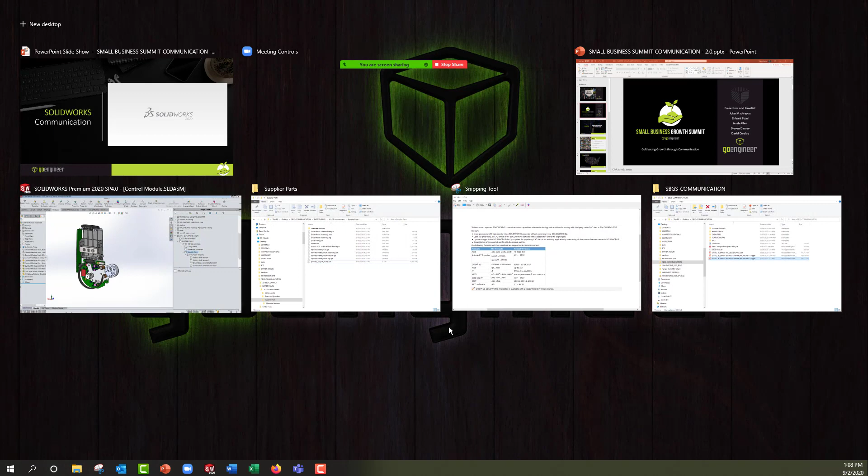I'm going to close this file here for just a second. So I've got a part. And with 3D interconnect, first you want to turn 3D interconnect on. At the top of your screen, click on Settings. And over on the left side, click on Import and make sure that this is enabled. Enable 3D Interconnect and click OK.

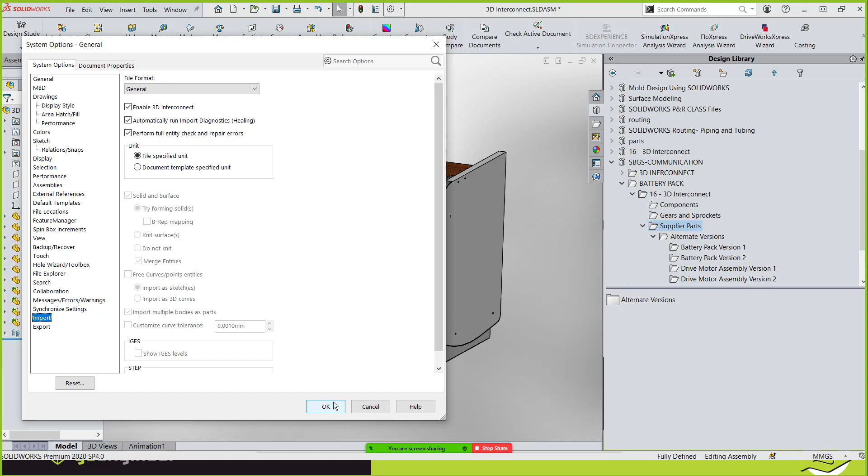And what that's going to allow us to do is to be able to bring in files. So what we want to do is we want to bring in a non-native SolidWorks file. Over here in our feature tree, you can see that some of these look just like SolidWorks parts. And you'll notice that some of these have a green associative arrow to it. That is allowing us to maintain that connectivity between a part that is a non-native SolidWorks part and our file. So let's import this part file.

So I'm going to go to Insert. I'm going to go to Component, Existing Part. I'm going to browse to here. And what we want to do is we want to bring in a non-native file. So over here on the bottom right of your screen, click on All Files. And I'm going to bring in an STP file, a step file. Now I'm just going to load it in.

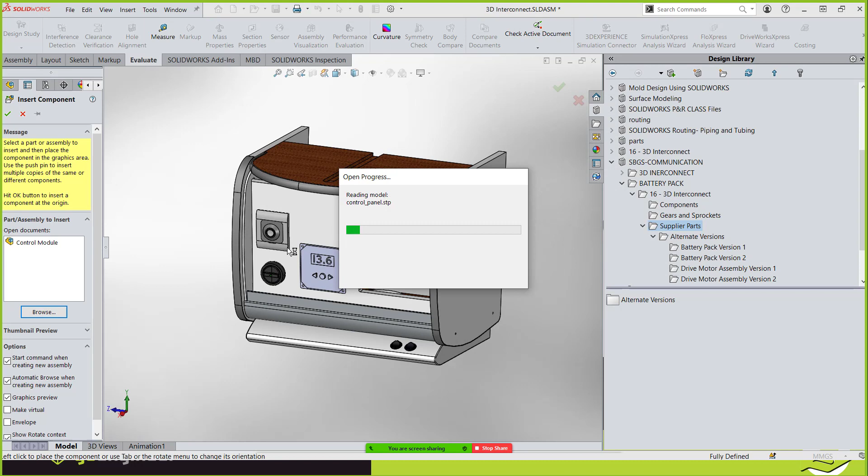And you can see here I brought it in. I dropped it in place. And I can do things with this, especially at the assembly level. So I'm going to pick on this edge, and I want to mate it up properly. So I'm going to right-click now, and I'm going to select Select Loop. And this loop right here, notice how when the arrow's pointing away, it's looking at this face.

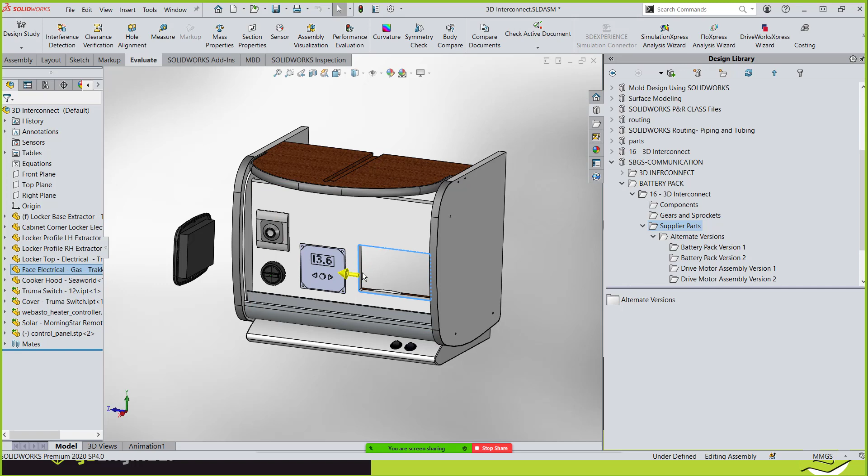But if I click on my arrow, I've now got the front edge of the plate. I'm going to hold down the Shift or the Control key. I'm going to pick on the back of the face. I'm going to mate this guy in place. And over here on the left, I'm not going to use a standard mate. I'm actually going to use an advanced mate, and we're going to use Profile Center.

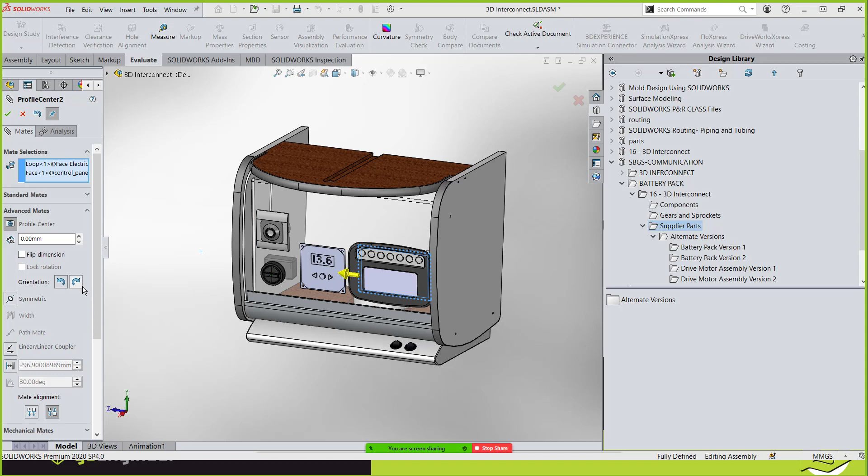And it came in upside down. Well, we're not finished mating this part up. We've got these two little arrows here, clockwise, counterclockwise, so I can just pick. And now I've got my part in my assembly. And my green check, and we're all good. Notice that control panel's added in, and we have our associativity to the original part.

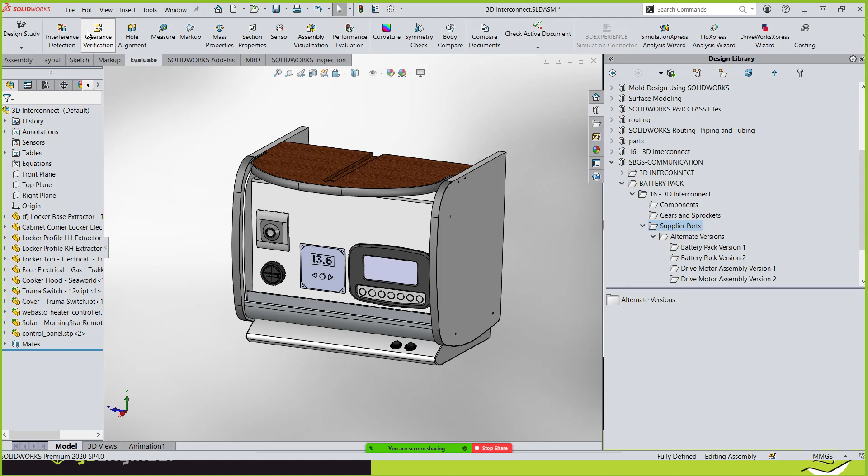If I wanted to check its fit, I could run evaluate, and I could run interference detection on this assembly. I'm going to close this one.

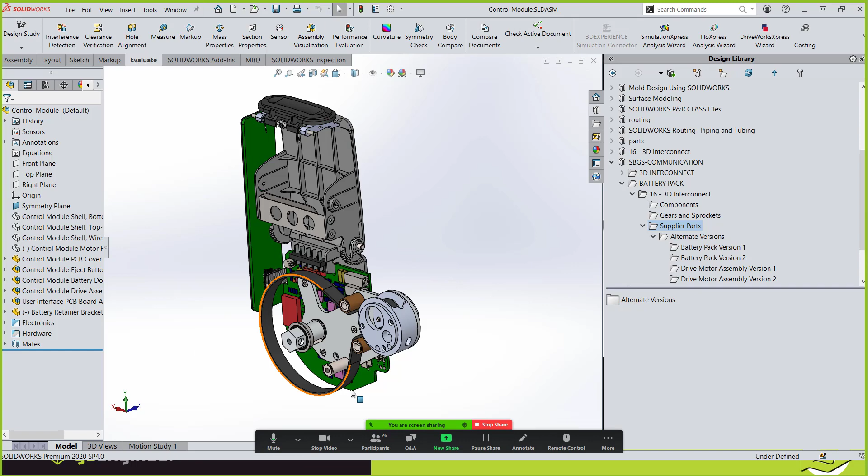Now we've got another assembly. And in this assembly, I want to bring in a PTC file. But first I want to open that part and I want to make some changes to it so that we can mate this part up properly in the assembly. And then what we're going to do is we're going to have some communication back and forth with our vendor. And then they're going to tell us, hey, we need to make some changes. We'll communicate those changes and then we'll reinsert this part back into our assembly.

So to do that, I'm going to go over here to, I'm going to open up some parts. 3D interconnect.

I'm going to open up this file here. It's a .prt.1. The way PTC works their revisions is the .1 is just telling you the revision. The .2 would be the latest if there was a revision, or a .3 or 4 or 5. So let's double click.

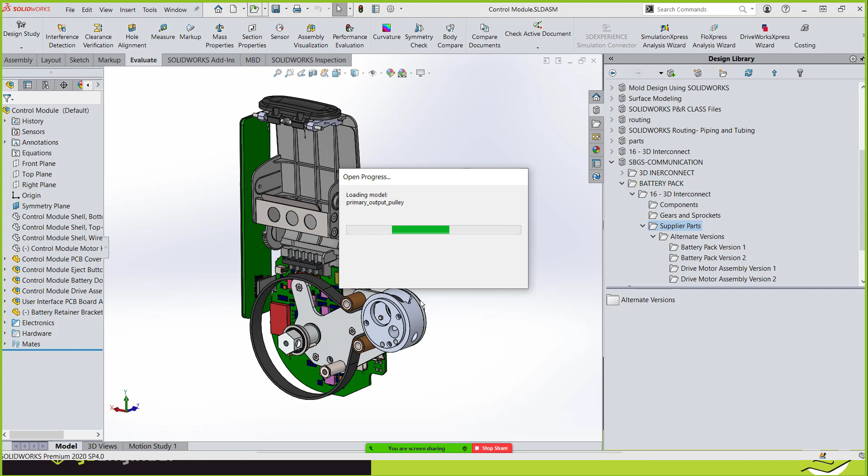And we're going to begin the translation process. So now we have our part in place, and there's our gear. Do we want to run diagnostics? I always hit yes, and it's looking for any faulty faces. We're just going to hit green check OK.

So now what we want to do is add some features to it. We've already added, in advance of this, a keyway and a curved slot to this part. So I'm going to drag my keyway over.

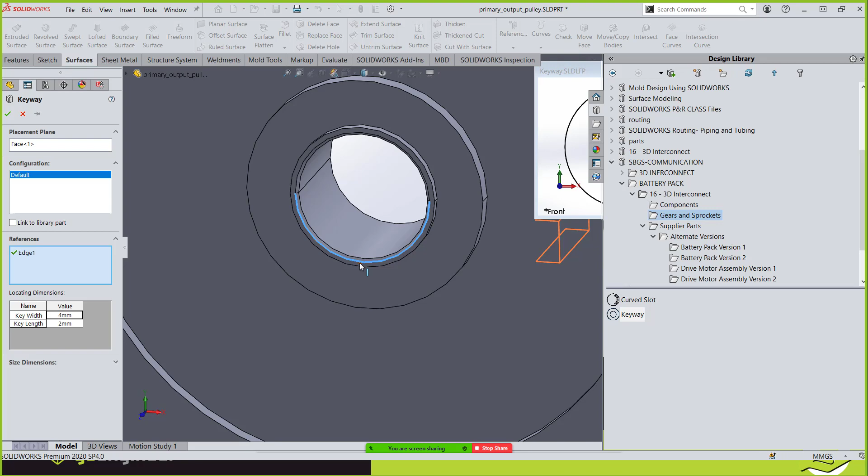I'm going to pick this face here, and over here on the left it's asking me for an edge. I'm going to zoom in and pick this edge. It's going to think for a second, and it's going to put that keyway into our part, the same way we would have done if we had just a native SolidWorks file, right?

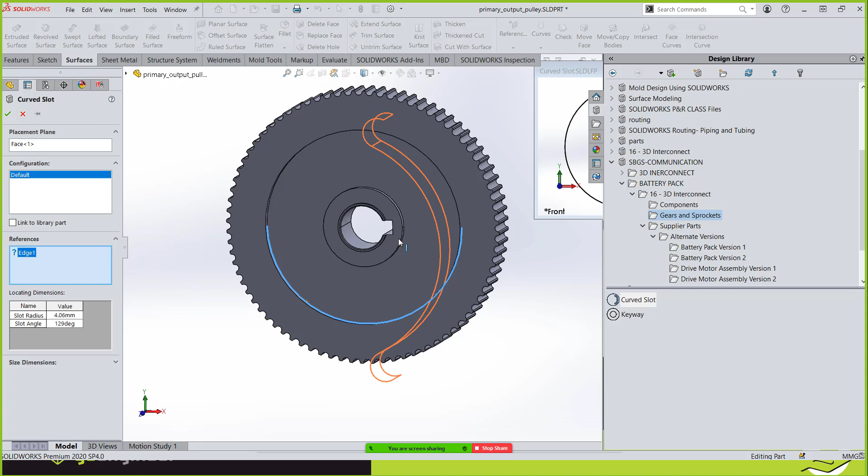Say OK. And what if we want to put this curved slot in here? I'm just going to drag it over this interface here, and for the edge I'm going to pick this inner edge here. I've added my library feature part, and while it's thinking, I've created this keyway and this slot in my part. You'll notice it's already translated it into a SolidWorks SLD PRT.

I'm going to hit save. Real easy—now I've got my SolidWorks part.

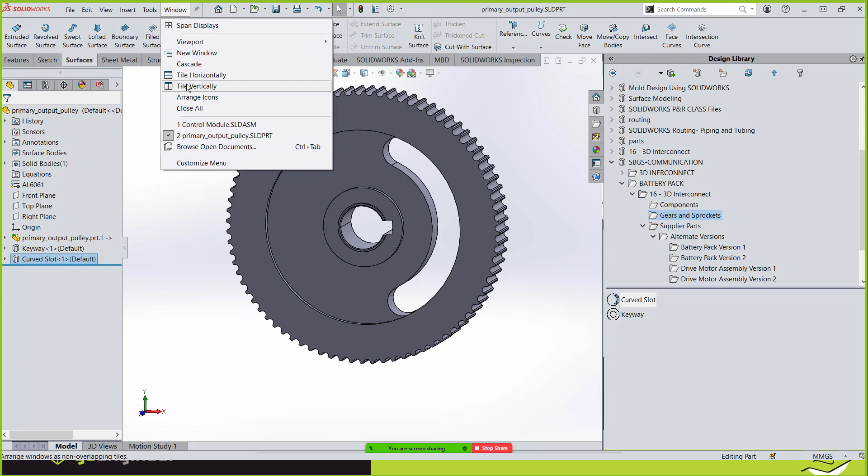Next thing I want to do is go to window, and we're going to get the assembly open here. And I want to drag and drop that part in. So give me one second.

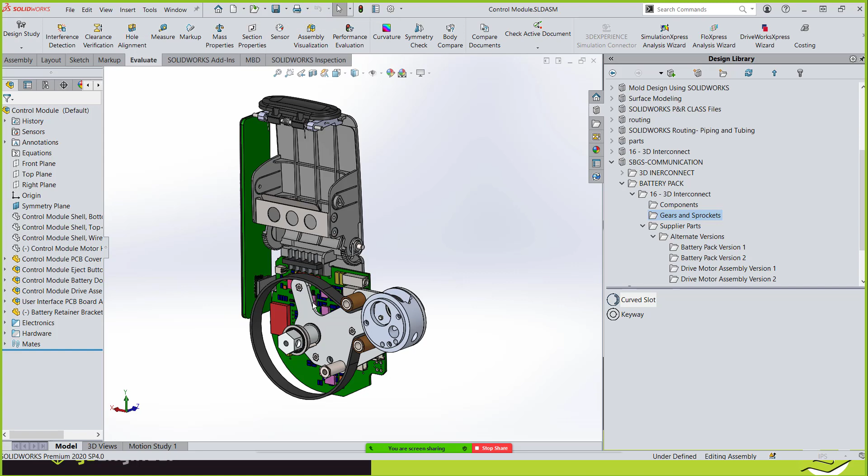We'll just do insert, component, existing part, assembly, primary output pulley, and we can drag and drop him in. We're going to mate him up real easy—let's do concentric. And we're going to move our gear out a little bit.

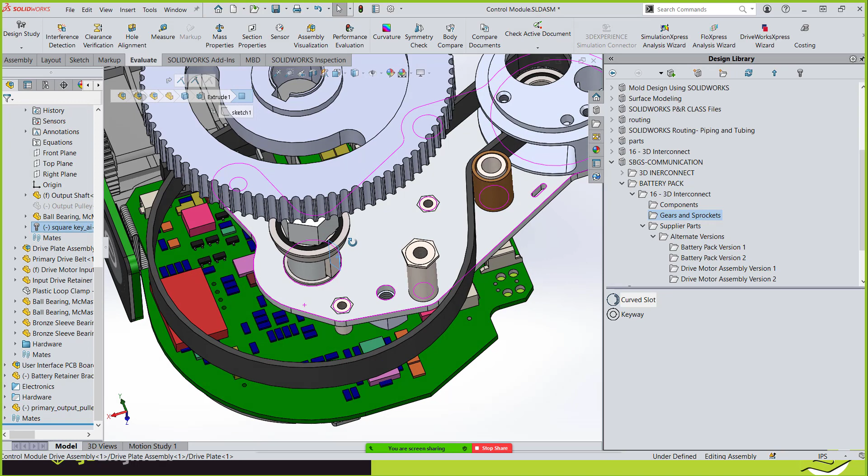I want to do a width mate on this keyway, so I'm going to pick this face and this face, and we're going to pick our four faces. We want to be able to mate up using this width mate. We're going to pick the width mate and see the part automatically rotate. We're going to hit the green check.

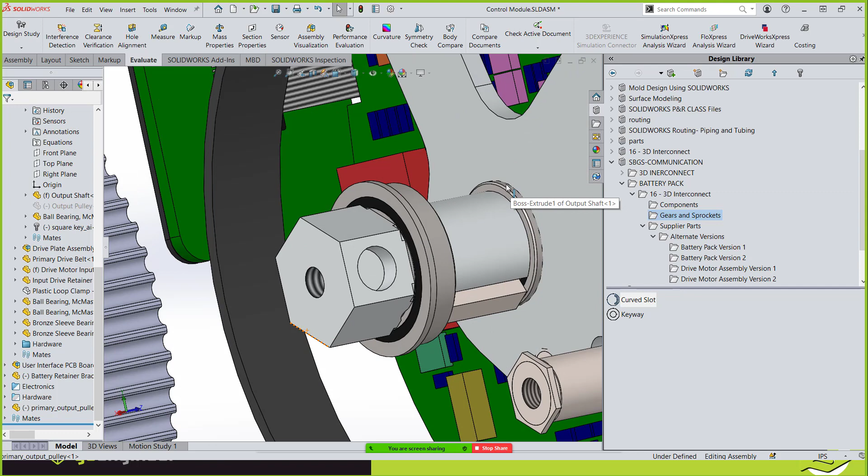Now all we have to do is mate the back of the gear into here. So we've been able to take a part as a non-native SolidWorks part and bring it in. Let's do a coincident. And now let's look at our assembly.

So, oh man, we've got a serious issue here. This is where we can save this part out, export it as an eDrawing, and send it back to the customer. Or we can do screen share, or Zoom like what we're doing today, and everybody can see the part.

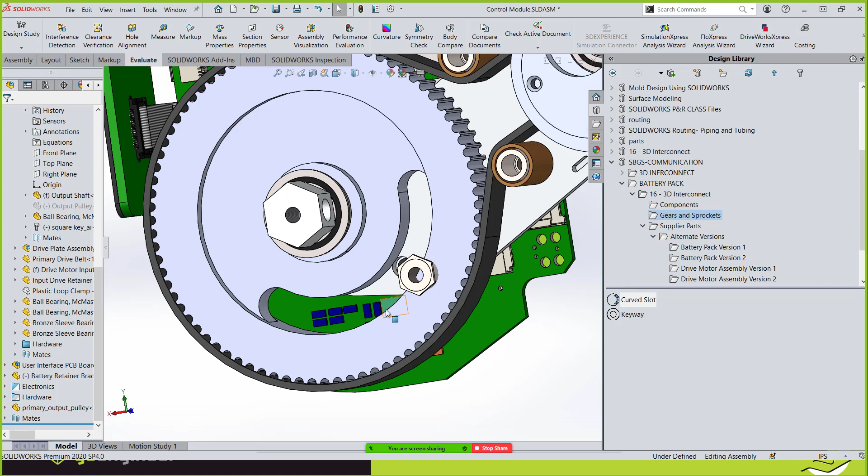And the engineers can now go, okay, guess what, we actually need to make a change to that part. So the engineers make a change to the part. What we want to be able to do from here is go back and get into where our new file is.

So imagine that they send us a new file. We've got supplier parts—there's our original part, and there's our solid part. And under alternate versions, they sent us a -2, or a .2.

I'm just going to do a Control-C, a copy. I'm going to go back one file, and I'm going to place it in that same folder where the original pulley was. With 3D Interconnect on, it's looking back at the original part, and it now realizes there is a second file in place.

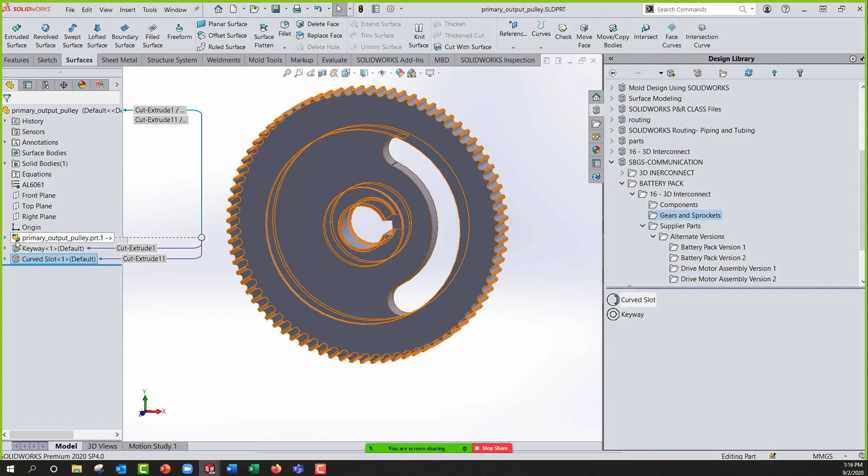Go back to our assembly. Let's open up our gear. Notice over here, we still have the green arrow for associativity, but we also have this little recycle symbol right here. So if we click on it and hit update model, it's now reading in model number 2. And this is a dramatically changed gear.

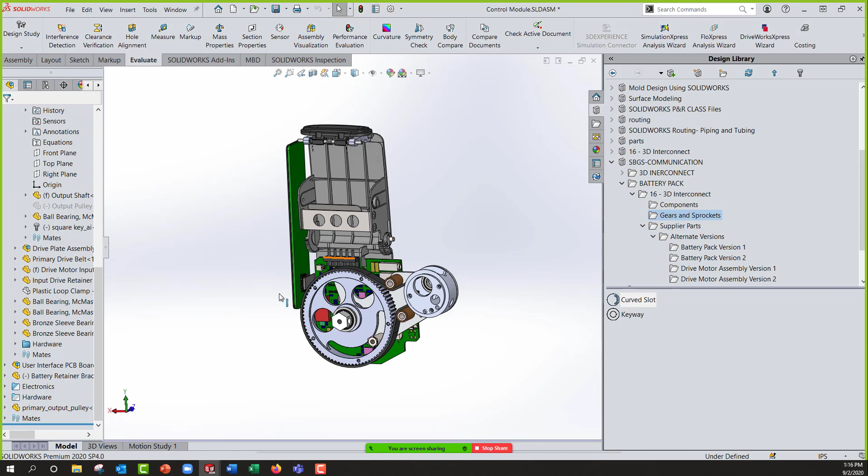So we say, cool, let's save it. You want to minimize it. And now our assembly is up to date, and we can run interference detection.

Using 3D Interconnect totally allows us to work with any type of file we've been able to use. We've been able to bring it in and maintain associativity, and now we're able to look at this part and work with it in a couple of different facets, right? We brought in the file, we changed it, and we're all set to go. I'm not going to save this.

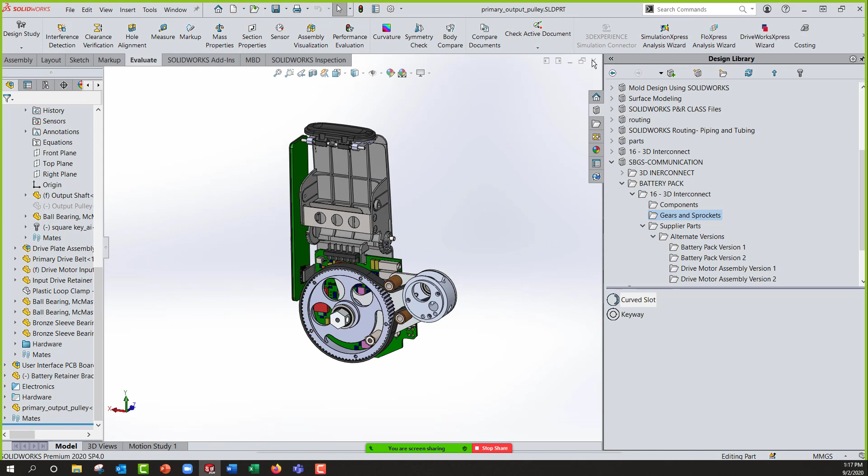Now let's talk about bringing in an IGES and a step and then a parasolid. So I'm going to go to open.

I'm going to open an IGES file. All of these are going to be the same so we can see the way SolidWorks is translating and bringing these parts in. So I've got this IGES file. I'm going to run import diagnostics again.

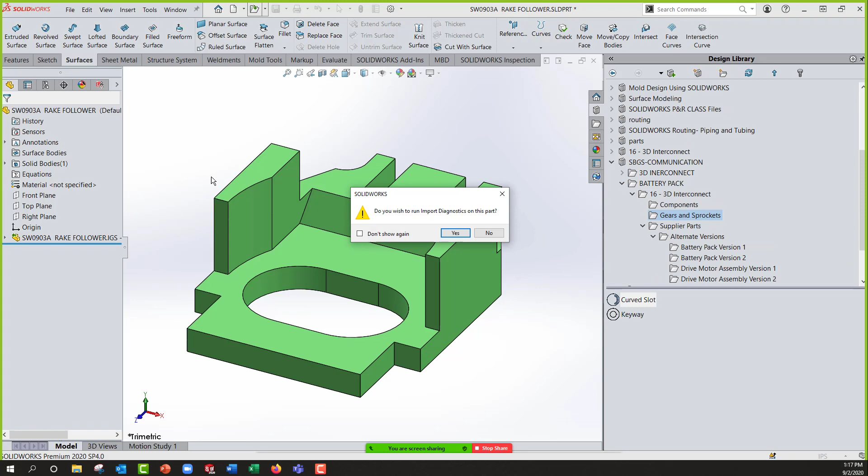I can see over on the left, unfortunately, I've got faulty faces. This is going to happen. Go ahead and run your diagnostic, hit the green check OK. We've got our green arrow for associativity to the original part.

Now one thing I'm trying to get to is look at this part and run FeatureWorks. I'm going to right click, go to FeatureWorks, and notice it's grayed out. The only thing available is options, and without FeatureWorks, the options don't work here.

So what can I do with this file? If I pick on this face and go to sketch on it, I cannot, because it doesn't recognize it as planar or flat. I can go in and sketch on these planes and create a feature, maybe a cut or something like that. I can grab this face, hold Control, grab this one, and maybe do a move face.

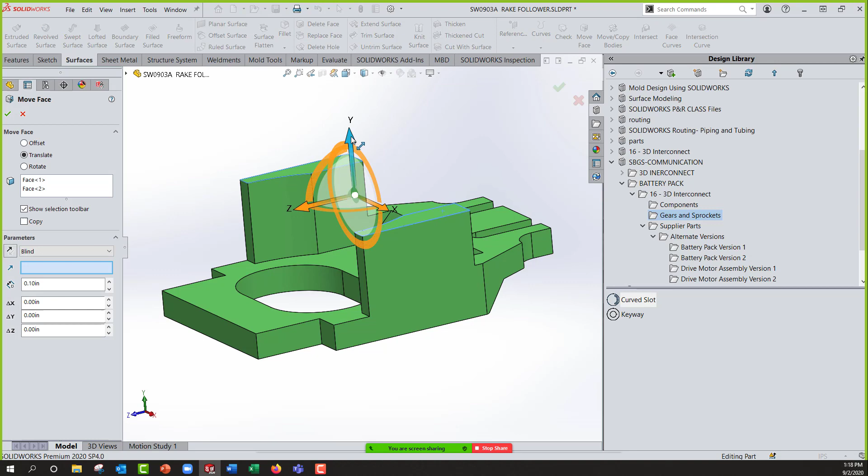I can grab this and pull these up in the Y direction, and move those around. I can grab this face again, move face, grab the orientation, and move these out in the Z direction. So if I do some features like a boss or a cut on an original plane, or create new planes, I absolutely can do that.

So we do have some flexibility with opening and controlling IGES files.

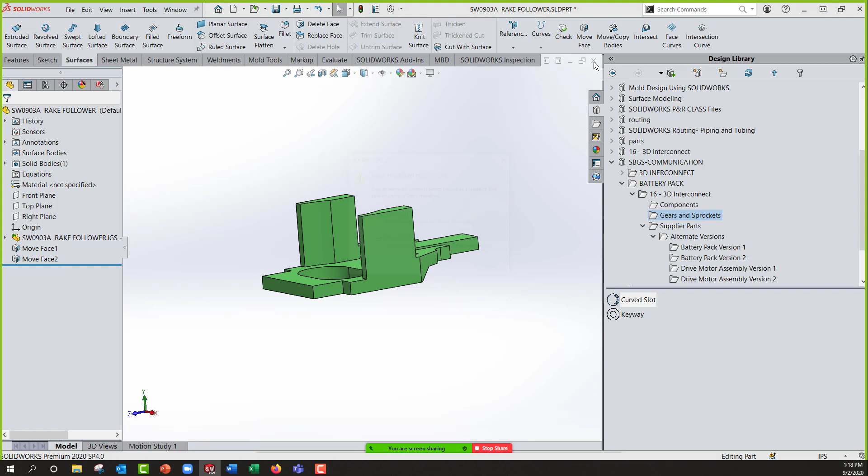Let's open a STEP file. So I'm going to open up a STEP file. And if you have any questions, please chime in on the chat. Steve Darcy is here, he can answer some of them, and I'll be answering them here shortly as well.

Again, we're going to run import diagnostics. Look at this—it actually recognized that because it's a different kernel and different code, SolidWorks interpreted it as having no faulty faces. That's pretty awesome. Do I still have access to FeatureWorks? No, I don't, it's grayed out.

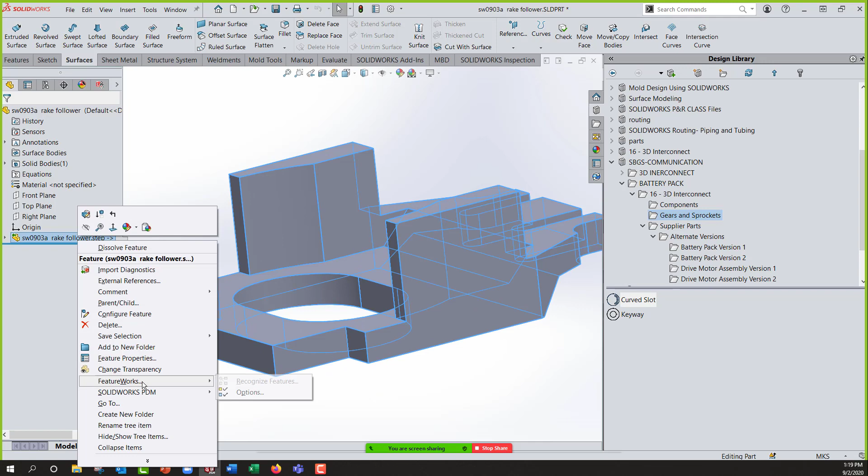So what can I do with this STEP file? Can I sketch on this face? I absolutely can. So now I've got something I can actually sketch a circle or whatever on, and maybe do a boss extrude. I could actually do that, or cut it out.

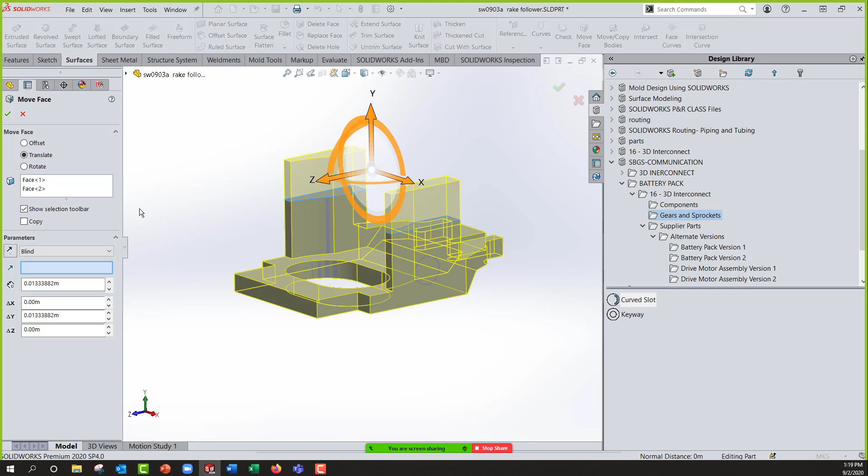Can I do the move face command just like we did with the previous one? Absolutely. I can do move face and drag it, or specify a value over here on the left side. So let's just use that move face.

And the cool part is, because I have access to this face, maybe I want to create a plane. With that, I can now create planes on these surfaces because they're recognized as planar. So now I can do a coincident, and we're in good shape. So I was able to clearly communicate some changes with this customer.

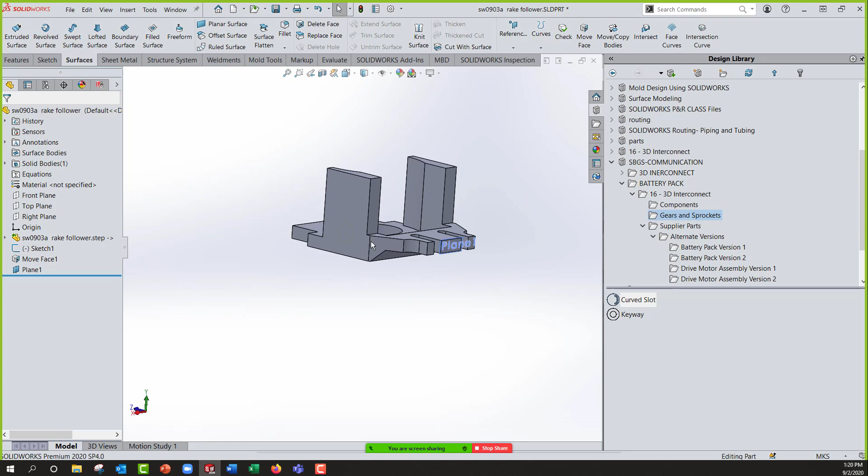This is a good model. It's not ideal—I don't have a feature tree, I don't have any parametric history with it. And that's ultimately the goal. So I'm going to not save that one.

Let's open up a .x_b file—that's a parasolid, the backbone, the kernel for SolidWorks. So we're going to double click it, and we're going to open this file.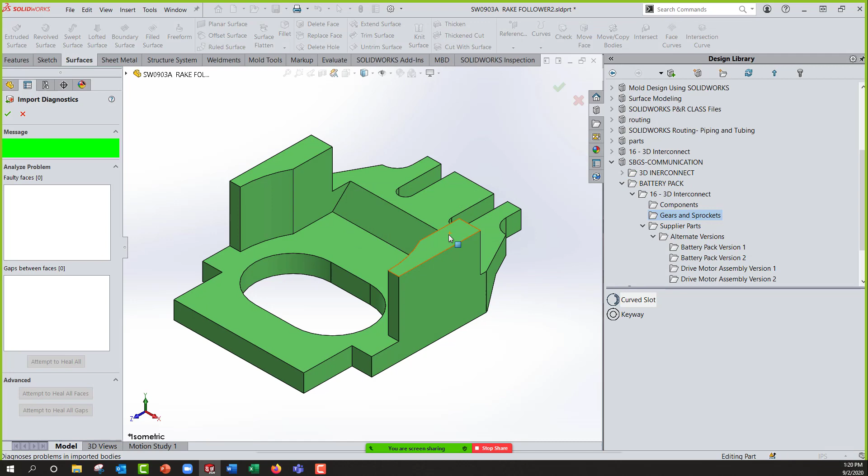We'll notice—yes, I want to run diagnostics—everything looks good and clean. Over here on the left, we notice the other ones had that associativity, but this one says imported. And when I click on this, I can go to FeatureWorks, and now FeatureWorks is no longer ghosted out, and I have options.

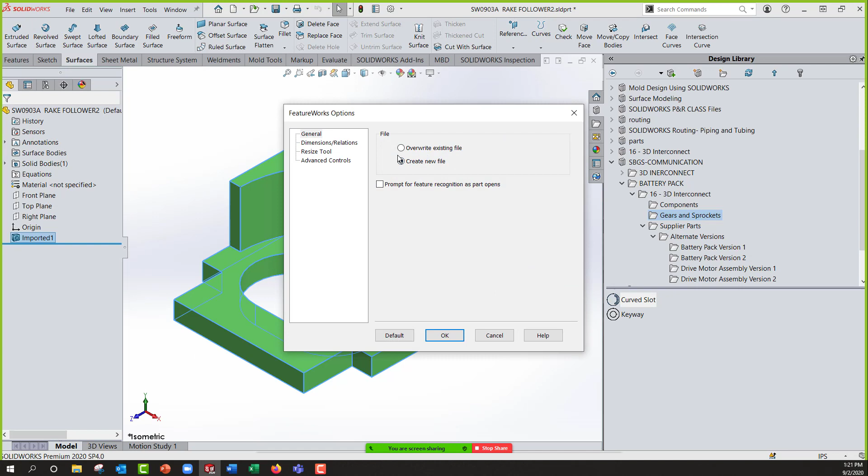So if I pick on options, what are they? I want to create a new file, or I can overwrite the existing file. When I dimension this—for today's demonstration, I'm going to leave this unchecked.

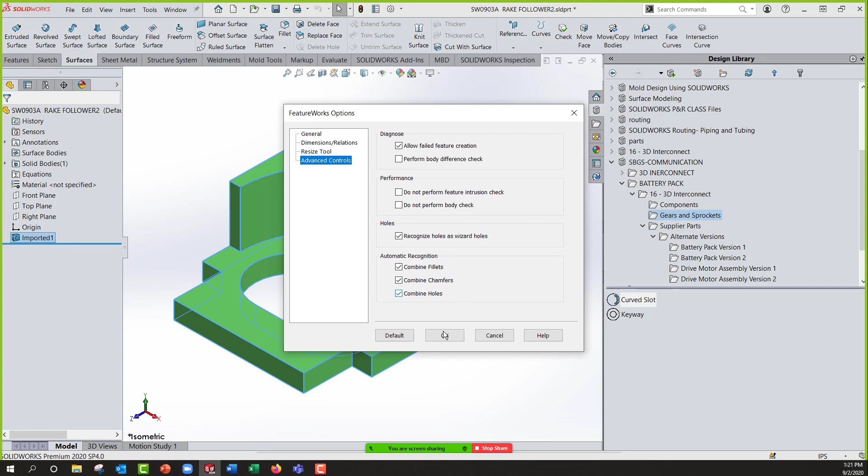If I was doing this on my own, I would absolutely add this. It will add time, but what it's going to try and do is auto dimension all your sketches that it brings in. If I check this, it's going to try to add constraints to help fully define your sketch. The resize tool and advanced controls we'll leave set as default for now, and say okay.

Let's go back - FeatureWorks, recognize features. Now, when we brought the other ones in, we didn't have a parametric history tree. Now all of a sudden we're going to run FeatureWorks, and this starts a little wizard on the left side. Do we want it automatic or interactive? I'm going to leave it set to automatic. Do I have a standard part or a sheet metal part?

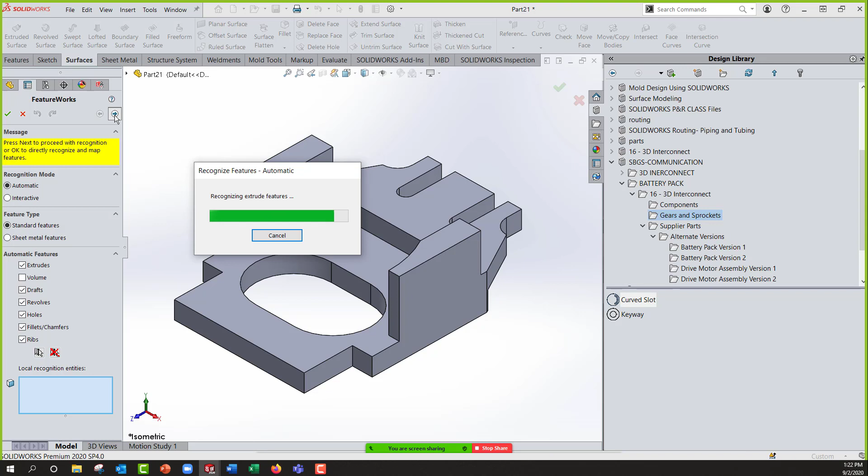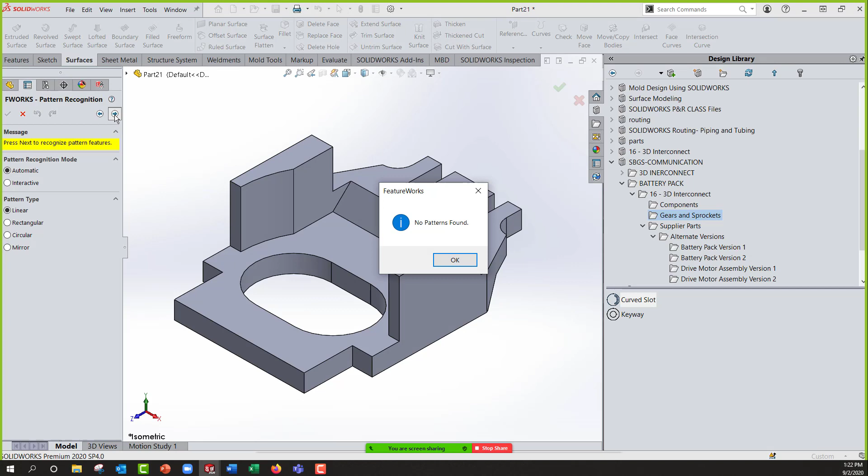I would like for it to find extrudes, drafts, revolves, holes, fillets, and ribs. Sounds good - we go up here and hit next page. Now it's starting to analyze this model, going through and looking at every feature to determine how this part was created. You can see it's recognized all these features - boss, extrudes, drafts. If we had patterns, like hole patterns, you could do find patterns, and it might be linear, rectangular, circular, or mirrored features.

If we hit OK, next, it's going to say it didn't find any linear patterns, so we say okay. From here we just hit our green check. The goal is to always have parametric history with our part, and that's where FeatureWorks comes in. Because it can recognize that parasolid, it does its very best to understand how this part was created - what it will do and what it won't do. What it won't do is create the feature tree based on how you might want this part created.

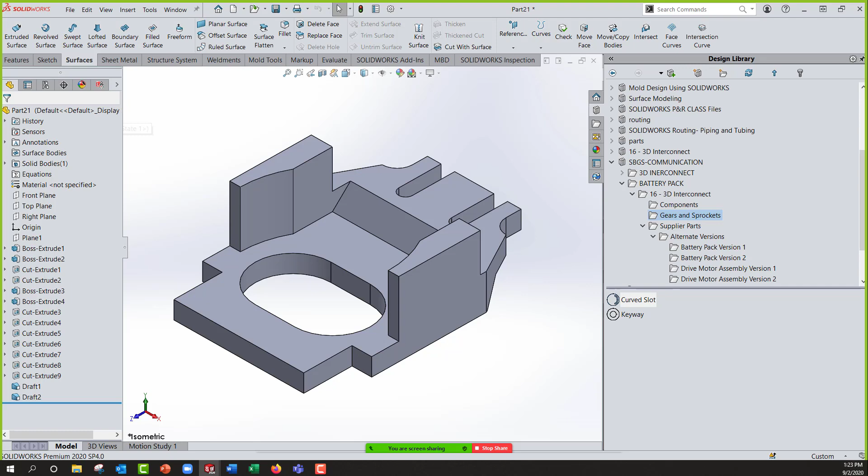And now we have features. Over here on the left, we no longer have an imported part - we have something saying it's associated. We actually have a feature tree. I can roll it back, I can look at this part, I can edit that sketch.

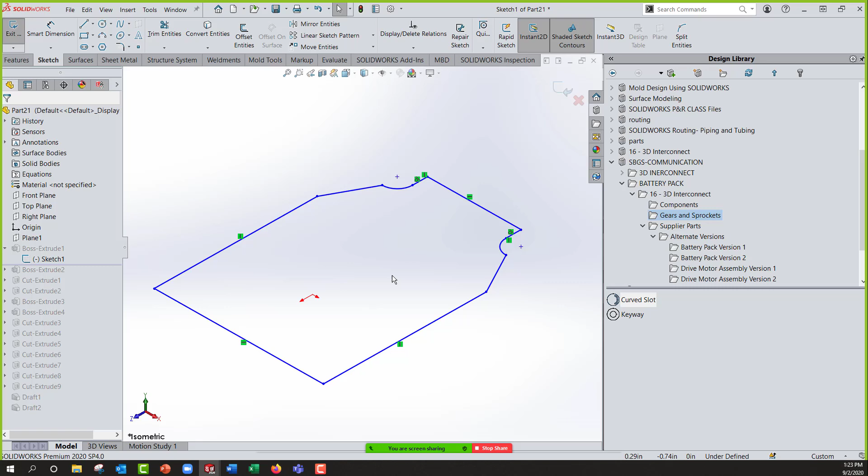Now, if you remember just a few minutes ago under options, I didn't check to dimension it or constrain it. Had we done this, most of the time you will get a fully defined sketch, though there are times you will not. What I typically do, guys, is when I get this, I go through each feature in each sketch and make sure they're fully defined, and then I'll start to manipulate the part if I have to do anything.

So here we can just roll through our history tree, and now we're up to our finished part. We can save this as a SolidWorks part, so now we have full control, and we have a parametric history of this part all the way through.

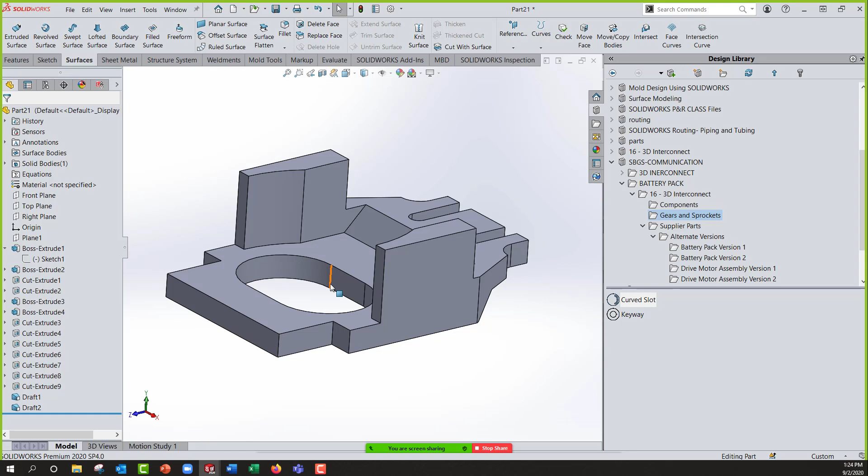So when we're looking at file types, whether it's a third party like Inventor or Creo, PTC, Autodesk, whatever that case is, we have things that can bring these files in - it's called 3D Interconnect. That allows us to work with and communicate with our vendors on non-native SOLIDWORKS CAD files. We also looked at opening a STEP file and what we can and can't do, an IGES file, and then we looked at a parasolid.

As a business owner, and I'm working with customers, and they ask what type of file can you use, I always try and get a parasolid if they can get it. If they can't, I know how I can work with them because I have things like 3D Interconnect and FeatureWorks when and where we can use it.